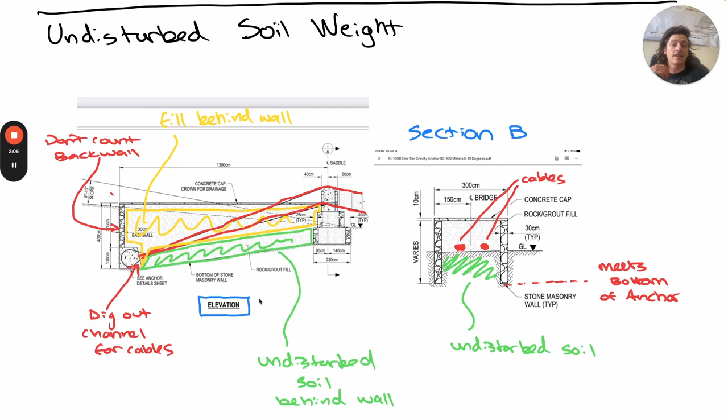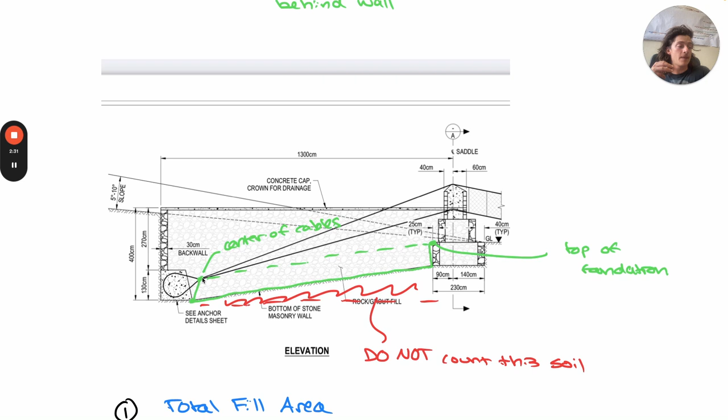Center of the cables. This is a better detail. I'd forgotten I'd written this out. Center of the cables here to the top of foundation. We'll not be counting that area below the ramp wall as soil because that's not going to be engaged with the entire abutment block, right? We just have this area below the cables from the center of the cables to the top of the foundation.

And now we can calculate our total abutment fill area. If we're calling this all fill, a portion of the fill is going to be number 3, our undisturbed soil area, and a portion of the fill is going to be number 2, our rock slurry area. That's the portion of the abutment that we actually fill with rocks, gravel, varying sizes of rocks, and do lifts of a grout slurry mix to keep that all together. So the total fill area is going to be the combination of the slurry plus the soil.

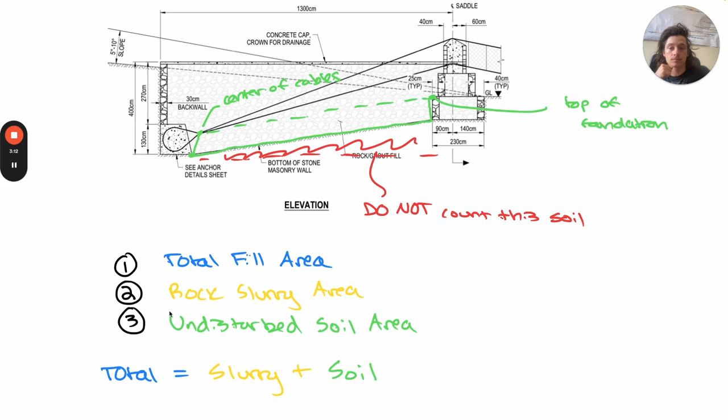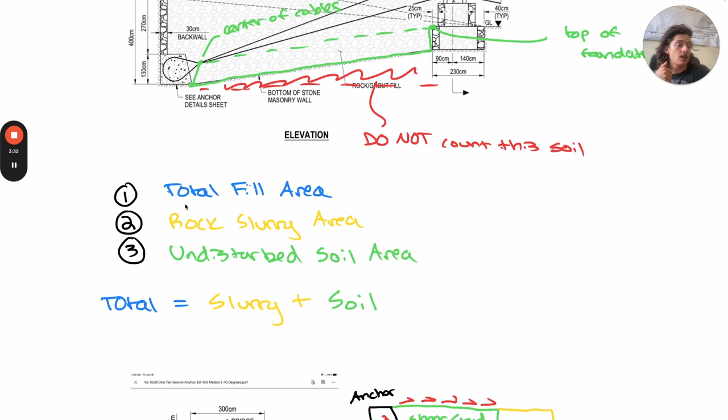And also be careful during this stage. I wrote a note up here to make sure not to double count the back wall. I calculate the back wall separately as a weight, so I usually just go up to the edge of the back wall. And then you can measure the undisturbed soil, which is an easier measurement to make. And then just use the equation I've written out here to calculate the rock slurry fill to save some time in measuring AutoCAD areas. Or, as you're updating your design, this is one less area you have to take.

But be careful when taking these values to only account for the soil that is on the same plane as the anchor to foundation line. This is what I was referring to and what I've written out in red. The reasoning for this is given in the following, which is really the reasoning why we include this undisturbed soil to begin with.

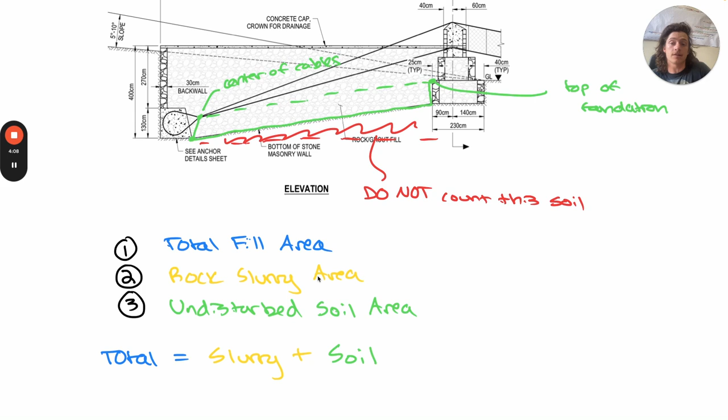So we can imagine this column of soil acting as a shear stud of sorts, sticking up from the ground and halting any movement of the anchor. And no part of the abutment is going to begin sliding until this soil starts moving. Part of this is what we've determined in the component analysis phase, when we're looking at individual components and their ability to connect to each other. Because of this, we decide to add the weight of the soil to our entire block in sliding.

However, to remain conservative about this assumption, we won't include the shear capacity of the soil in the passive pressure exercised by this soil plug. So you can imagine there's this soil shear stud, and not only is it just weight, but actually getting it to move, it's going to have some sort of shear strength at that interface, and we're not going to include that because we don't want to be relying the entire bridge on the capacity at that interface, especially if there's a flooding event and it gets wet and then no longer has any shear capacity. So we'll ignore all of this, but we will use the soil weight.

And then ultimately we can rewrite our P-ramp equation. You may remember it from the basic course, or rather the binder. The P-ramp equation is the sum of the ramp walls, the slurry rock fill, and the soil weight. So this is going to be the entire weight of our ramp that we've discussed so far.